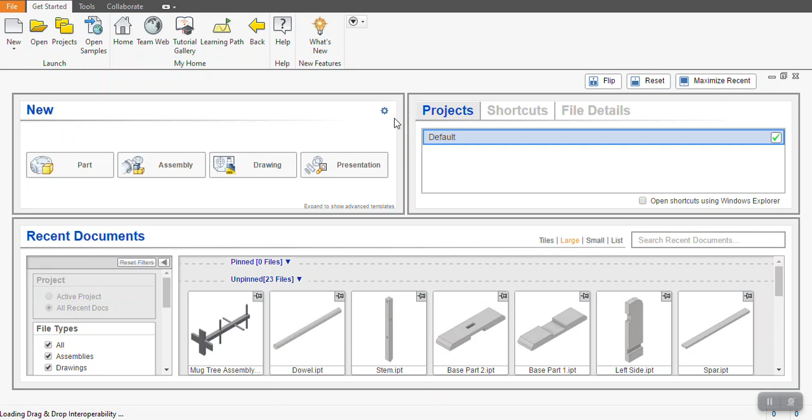So we're going to start by making the base. The base is made up of two parts which form like a cross halving joint. So I'm going to make the lower of the two parts first of all. So once Inventor is open, I'm going to start a new 2D sketch. And I'm going to start that on the horizontal ground plane.

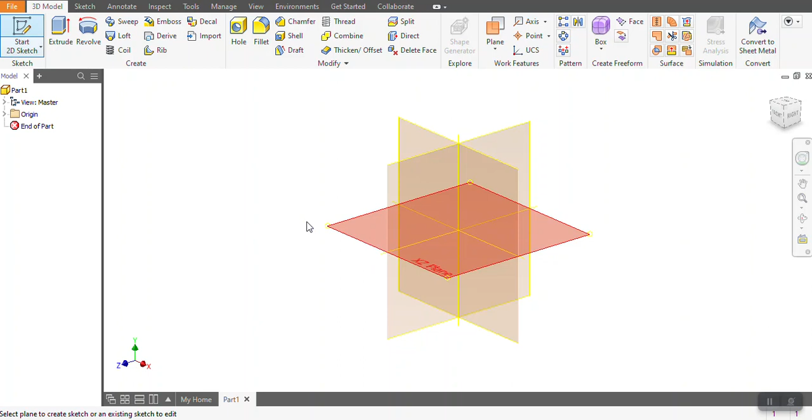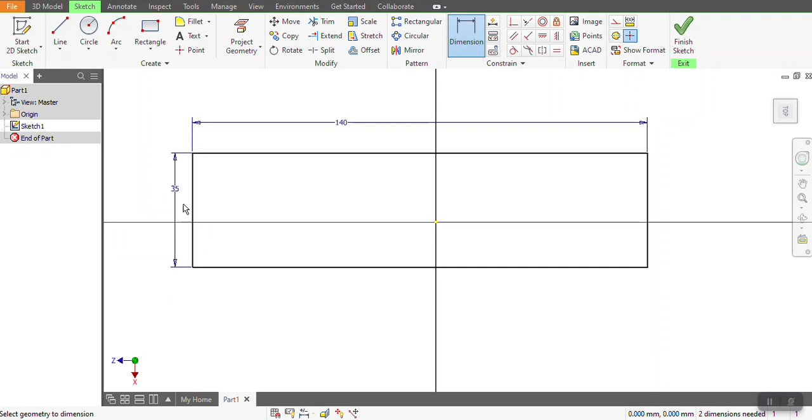I'm going to start by drawing a rectangle, and once again sketch the rectangle and then dimension it to size. So the dimensions that I'm going to use are 140 long and it is 35 wide. Once I've actually done that rectangle, I finish the sketch and then I extrude it. So in extruding it, I'm giving it a height. The height I'm going to give it is the thickness of the material, which is 12 millimeters.

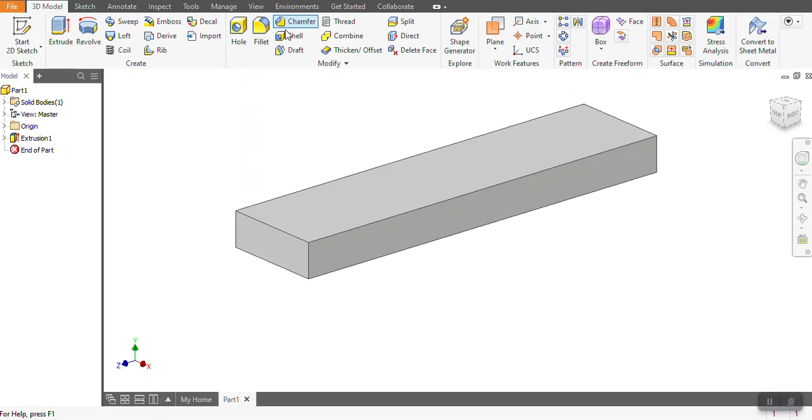Okay, I'm going to add a chamfer onto the two ends, a 6mm chamfer. So up in the top, I click on chamfer. I'm going to change the size of the chamfer to 6, and then I'm going to click on the two top edges at both ends and apply.

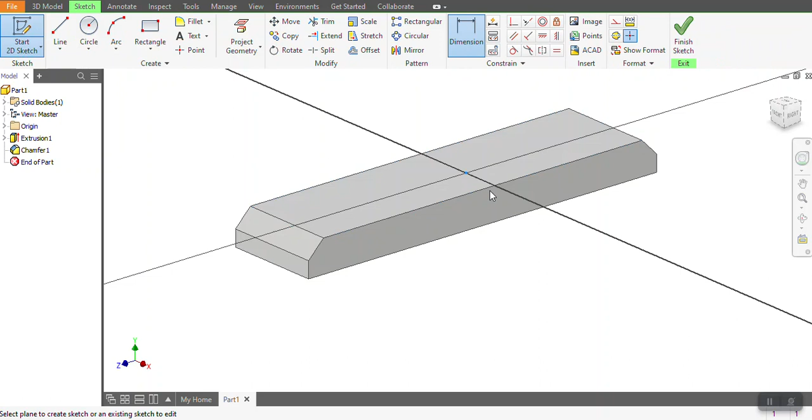Okay, so the last thing to do to this part of the base is to create the recess for the cross halving. So I'm going to start a sketch on the top surface. I'm going to draw a rectangle which starts at one side and goes all the way to the other, and dimension it. Now the rectangle is to be 35 wide, and from the edge to the start of the first rectangle is 52.5 millimeters. That puts it perfectly in the middle.

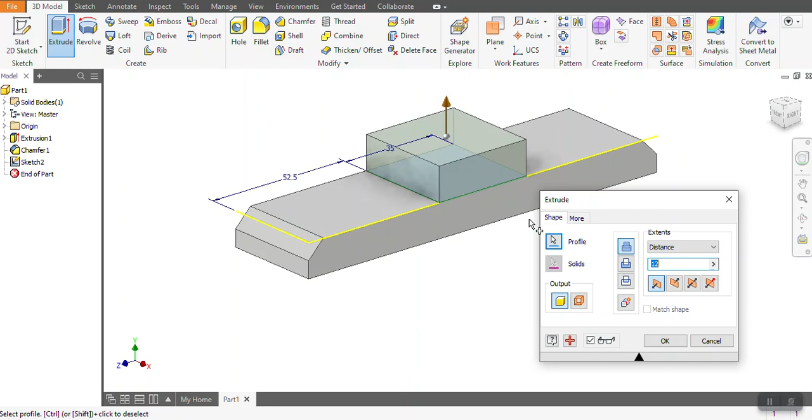So I finish sketch at that and then extrude. So I need to select the rectangle, and instead of joining it on, I'm going to cut it away, or subtract as it's known, and I'm going to change the distance to be 6 and OK. Okay, so I notice I've got a little bit on the end here. That's just because when I did my initial sketch, I didn't take it all the way to the edge. You can see there, so I'm just going to pull it a little bit up like that and finish sketch, and that should get rid of it.

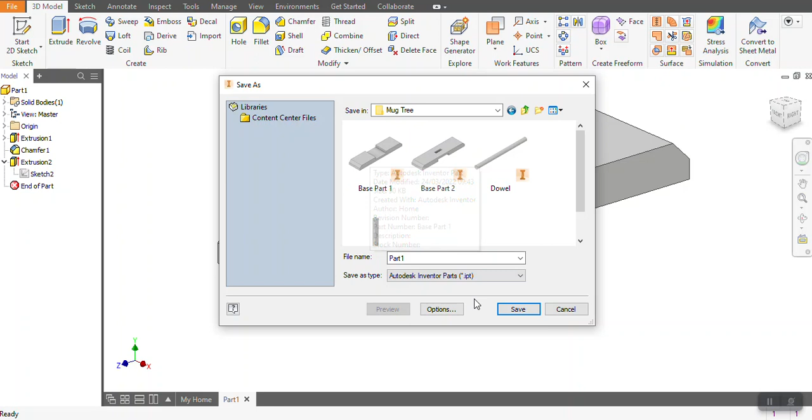Okay, so that's the first part. So I'm going to say File, Save As at that point. I'm going to save it into my documents. I'm going to create a new folder called Mug Tree, and I'm going to call it base part 1. Okay, so I've done that there. Okay, so that's the first part done. So we're going to then move on to the second part, the other half of the base.

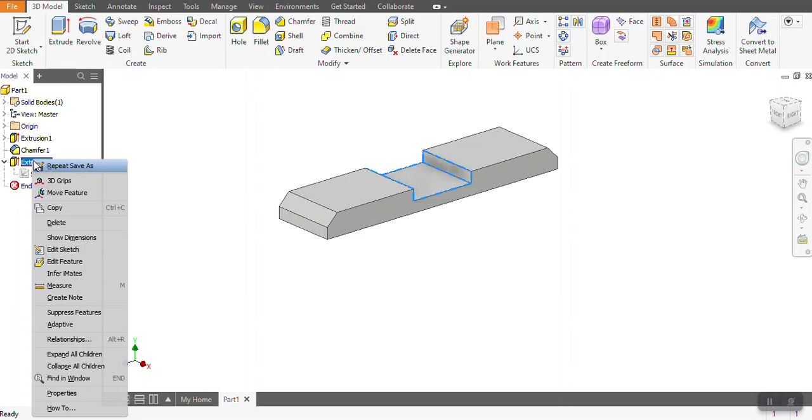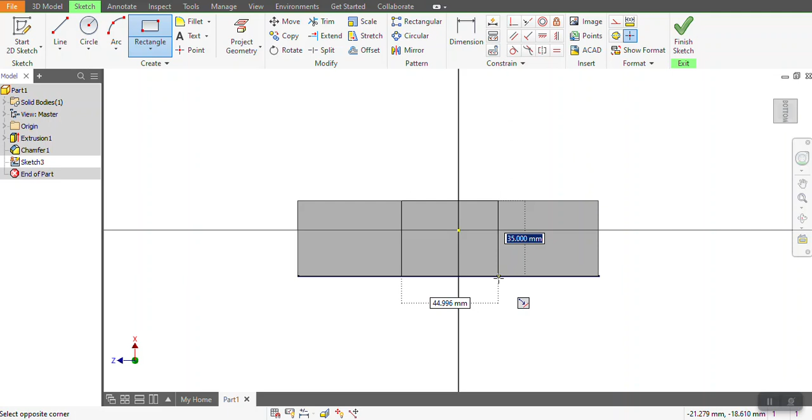Now, instead of starting the whole thing from scratch, what I'm actually going to do after I've saved this is delete away the extrusion. I'm just going to right click on top of that and say delete, because the second part is basically the same, but I turn the object over and start to draw the sketch on the bottom here. So I'm going to start a sketch on the bottom, and it's the same rectangle that I did before. It's going to start on the rectangle, finish on the rectangle, and it is 35 between them. And the distance from the edge to the first one is 52.5 again.

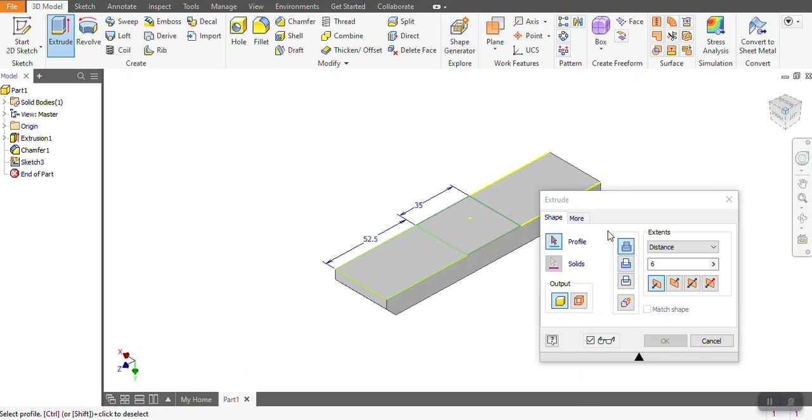Finish sketch and extrude. Okay, I'll just get into a slightly better view. There we go. So I'm going to subtract that by 6 millimeters. And now what I've got is the other piece of the base. Now, this one is also going to have what's called a mortise in it for the mortise and tenon joint to join the stem together.

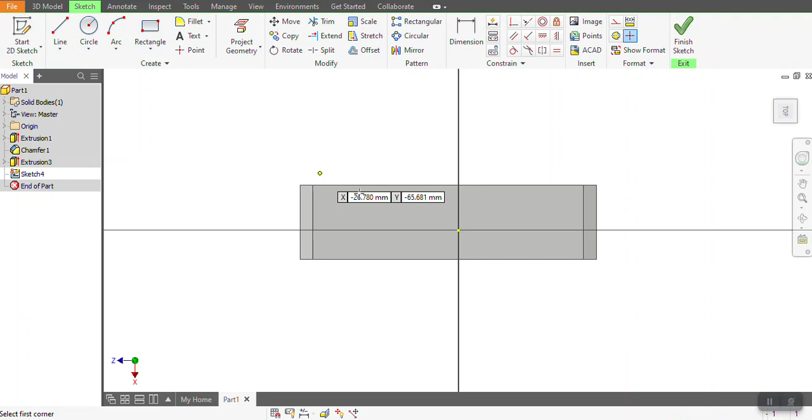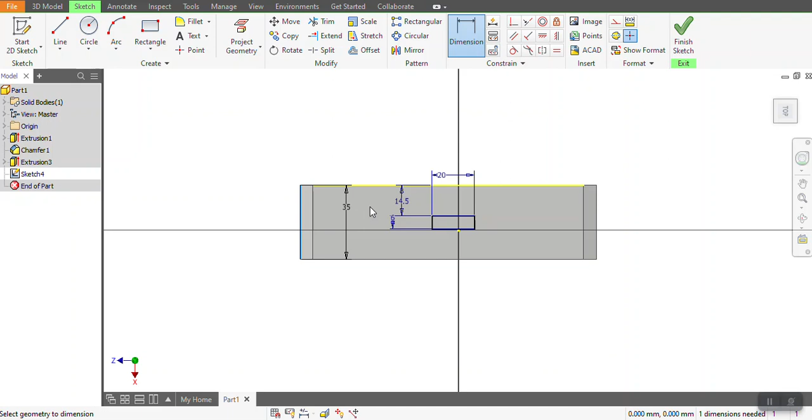So the last thing I'm going to do is a sketch on the top surface. I'm going to draw a rectangle somewhere in the middle here. Okay, I'm just going to draw it in about there. The dimensions of it are 20 long, 6 wide, and I need to get it in the middle. So from the edge to there is going to be 14.5 millimeters, and from the edge to there is going to be 60 millimeters.

And I'm going to finish my sketch there and extrude, cut that little bit away by 6 millimeters. And that is me now done the second part of the base. So I would do File, Save As, and I would call that one Base Part 2.

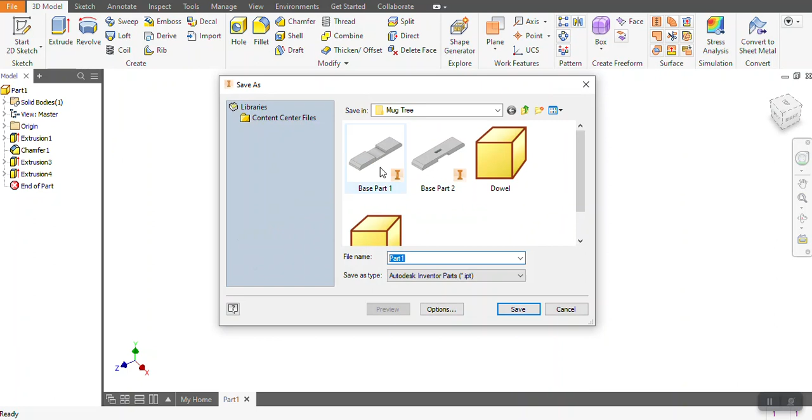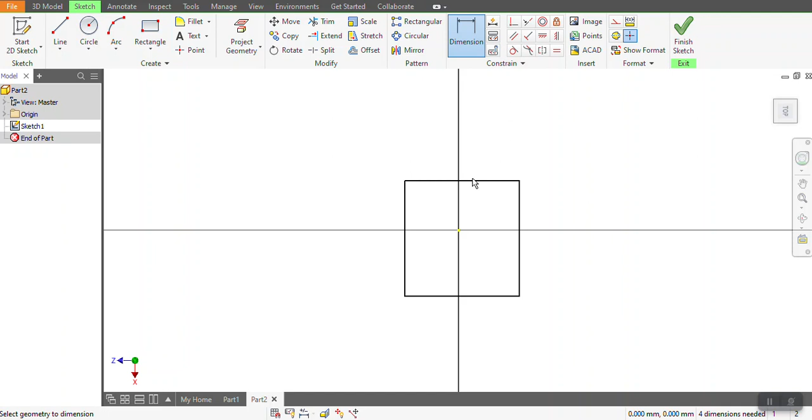Okay, so now we'll move on to the third part, which is the stem. We're doing a new one this time, standard millimeters. I'm going to start by drawing a square on the ground plane, using the rectangle tool, and dimension it as 20 millimeters by 20 millimeters.

I finish the sketch, and I'm going to extrude that by 320 millimeters long. That gives me the stem.

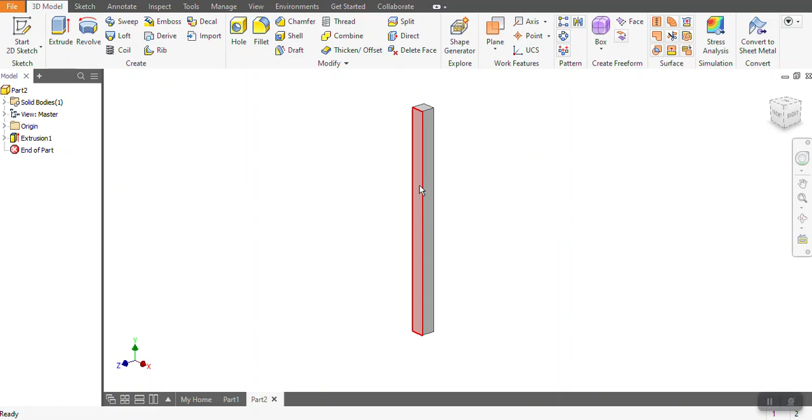Okay, so I've got some holes to put into this. First thing I'm going to do is put some holes on one side, so start a sketch on this first side here. I'm going to do the first hole, which is in the middle. It's a 9 millimeter hole, so I'll dimension it 9. From the base to the center of the hole is going to be 120.

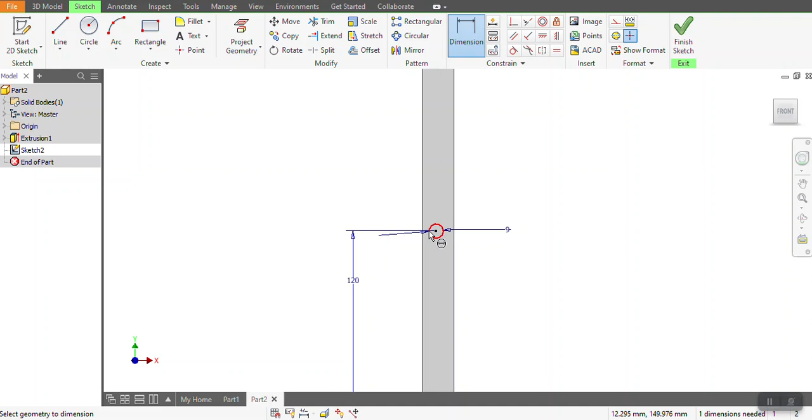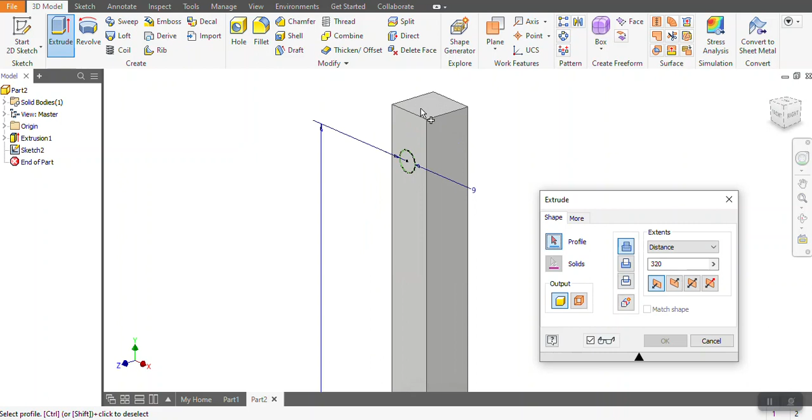Then I'm going to do a second hole, still in the center, in line with that one. It's 9 millimeters in diameter still, and the dimension from the center of that hole to the center of the other hole is going to be 180. Finish sketch, and I'm going to extrude, click inside both holes. This time I'm cutting them, and I only have to go through by 20, and OK. So that gives me the first two holes for the dowels to go through.

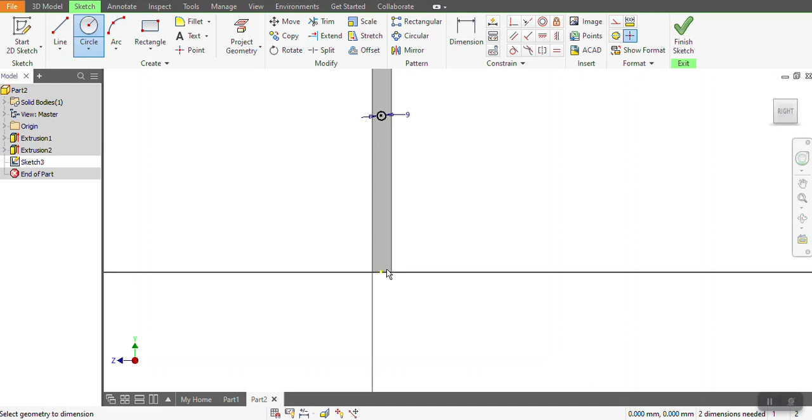I'm now going to start a sketch on the second side and do exactly the same. Circle up in the middle there, diameter 9, and dimension from the bottom to the center of the hole is going to be 210. Finish sketch, and extrude, cut, and OK. So that's me got the 3 holes for the dowels to go through. If I rotate it around, you can see those holes go all the way through.

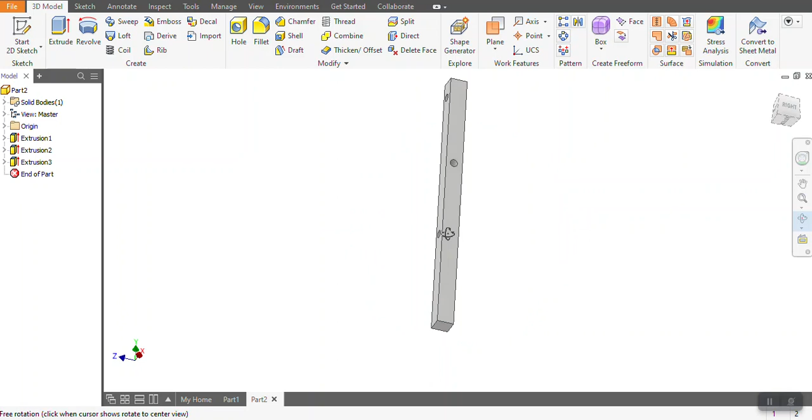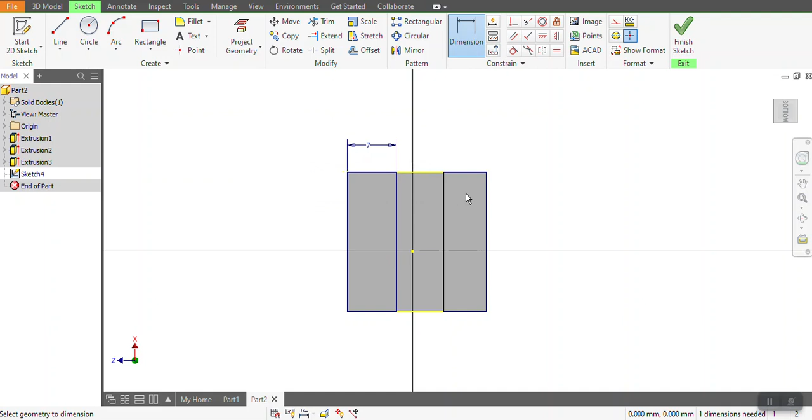So on the bottom of this, I'm now going to sketch some rectangles for the mortise and tenon joint. I'm going to use rectangle, starting right on the corner, come down, and then do the same starting on this corner, come down. Dimension from the edge to here is meant to be 7, and the same for this one, from here to here is going to be 7. Finish my sketch, and I'm going to extrude those away.

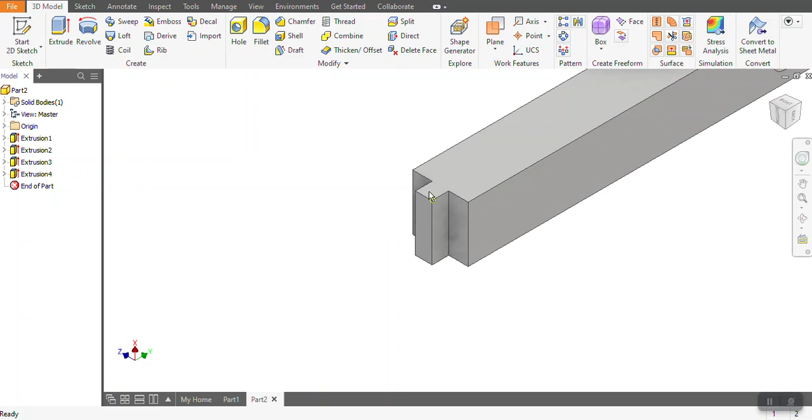Okay, so if I show you what that's going to look like, I'll do extrude, click inside both rectangles. I'm going to cut them 6 millimeters deep, and OK. What that has given me is a tenon that can fit inside the base part.

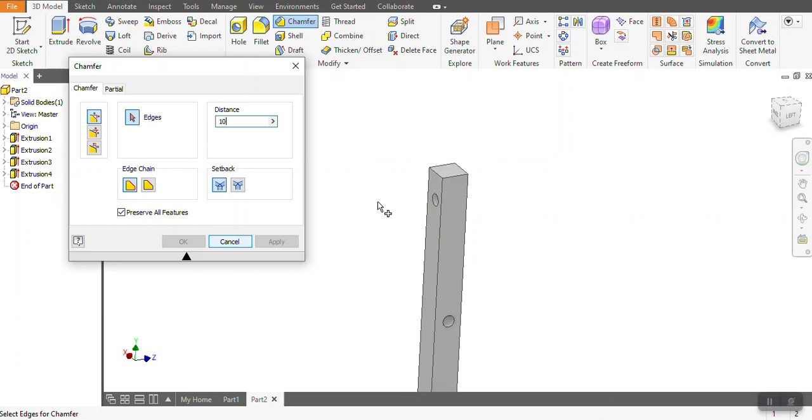The last part of this that I'm going to do is have a go at making a little square pyramid on the top, using chamfer for that. I'm going to set the distance of the chamfer to 10, and just do each one surface at a time. So I'll click on this one and apply, then click on the one next to it and apply, then rotate it round and click on the next one and apply. Now I can't do the last one because there is no bit to apply, but I've now got 3 of the sides done.

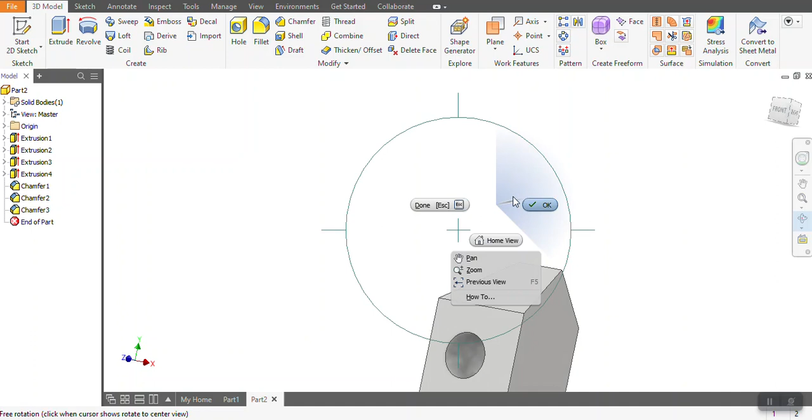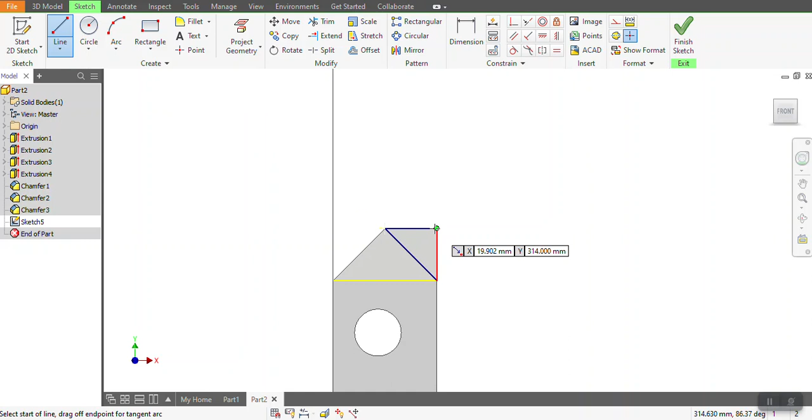So what I now do is say start a sketch on this surface, and I'll go all the way back up here. I'm going to project this corner onto my sketch, and project this line onto my sketch, which means I can then draw a line going from there to there, a line going from there to there, and lastly a line going from there back down to there. So I've drawn a little triangle, which I'll show you what that looks like.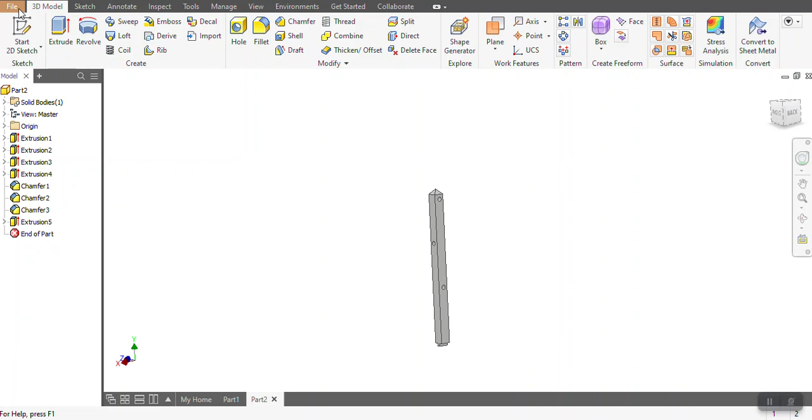I'm just going to say extrude, cut, and it's got to go through at least 20 millimeters, and OK, and that removes the last side. So having done that, I'm going to save that part now as the stem. File, Save As, and we're going to save that as the stem.

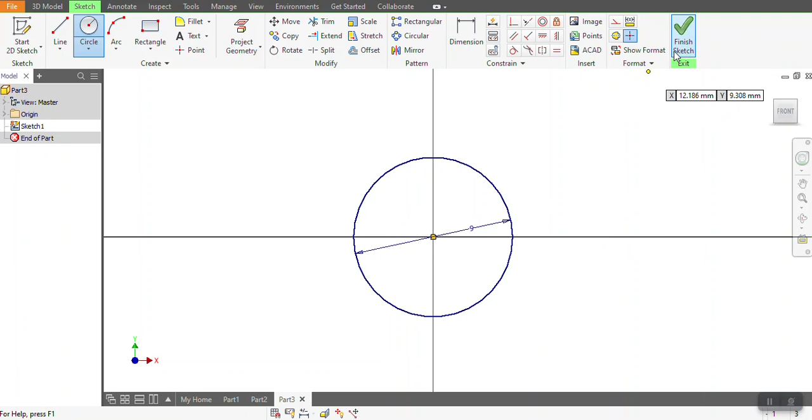Okay, the last part are the dowels. They're going to need 3 of them, but I only have to make 1. So File, New, once again standard millimeters. The holes that I drew were 9 millimeters in diameter, so I'm going to make the dowels 9 millimeters in diameter, like that there. Finish sketch, and extrude by 140. That's the length of the dowels.

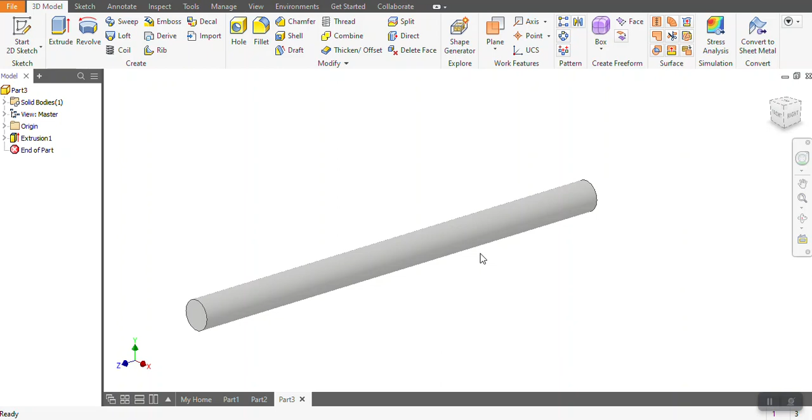So that's it. File, save as, and save that as the dowel. Okay, that's all the parts of the mug tree made. That's the end of this demonstration video. The second video will now take you on how to actually assemble the parts together.